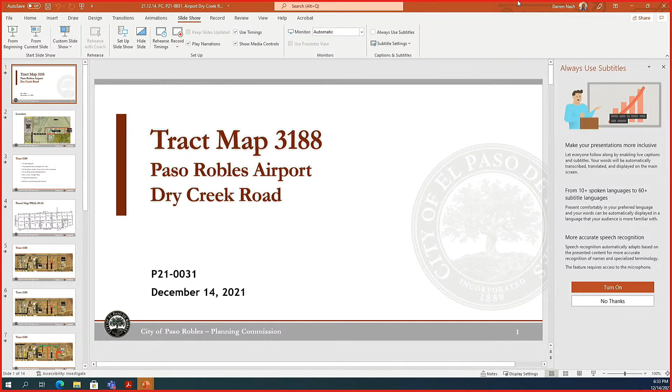So as you stated, this is for tentative tract map 3188, which will be out at the airport. Here's a general location map. You can see Airport Road running north-south off to the left of the screen, and then you've got Dry Creek Road running to the south of tract 3188, shown in the red box. You can see the Estrella Warbirds Museum is at the eastern extent of the tract map.

So there are 11 existing lots that are going to be impacted by the map before you, and the map does result in a total of 12 proposed lots for a net gain of one lot. The tract map is largely to facilitate airport lease sites and circulation in this neighborhood of the airport.

The tract map does include the abandonment of a road known as Cirrus Way. This is an unconstructed road, but it does exist as a legal right-of-way. To replace Cirrus Way, there is a new road proposed, to be named Wright Way, which would be a cul-de-sac ending road. There are also a series of easements both proposed and abandoned as part of this tract map. The tract map does need to be approved by the City Council, so the Planning Commission will be making a recommendation to the City Council this evening.

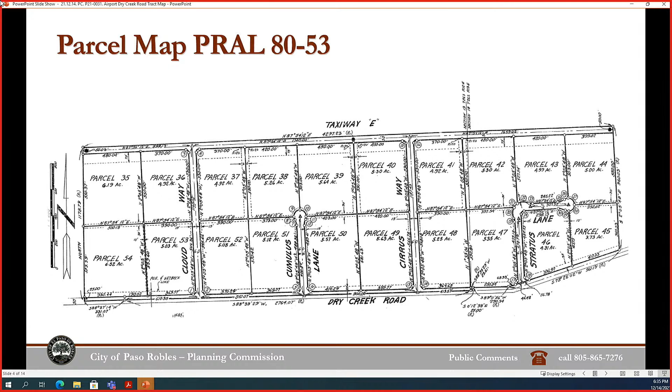So here is parcel map PRAL 80-53. This is a lot line adjustment that was recorded back in 1980, and it established the general circulation and lot pattern along Dry Creek Road. There have been a number of amendments, lot line adjustments, and lot mergers over the years. They are enumerated in the staff report, but I'm not going to go into all that detail, although we certainly can if needed.

But essentially it does result in this general situation - out on the ground it looks like this today. You can see the lots that have numbers on them; they range between 39 and 54. They're not entirely numerical, but these are the lots involved this evening. In addition, there is a remainder lot that some of the airport runways are on, and some of that will be consumed into parcel 45 at the eastern extent of the tract map.

You can see that there are currently Cloud Way, Second Wind Way, and Cirrus Way going into the site, and Cirrus Way is the road that will be abandoned. So here you can see that Cirrus Way is going to be abandoned, and then Wright Way will be established between lots 48 and 47.

As mentioned, the Estrella Warbirds lot, which is lot 45, will be extended out to the east. This isn't exact, but it gives a representation of land that will be added to that lot. That gets taken from the lot that holds all of the airport runways, and then it gets put in for the use of the Estrella Warbirds Museum.

Now we're moving from right to left on the screen. So like I said, lot 45 gets changed. In addition, lots 42 and 47 will be split from each other, and you'll end up with two 5-acre lots there, 42 and 47. Further west, the lot line between lot 53 and 54 will be moved, now in blue, so that the northwest running property line will be made straight all the way up to airport taxiway F. So these are the lots that are changed, by roads being abandoned, lots moved, and then the couple of lot splits and lot line adjustments there.

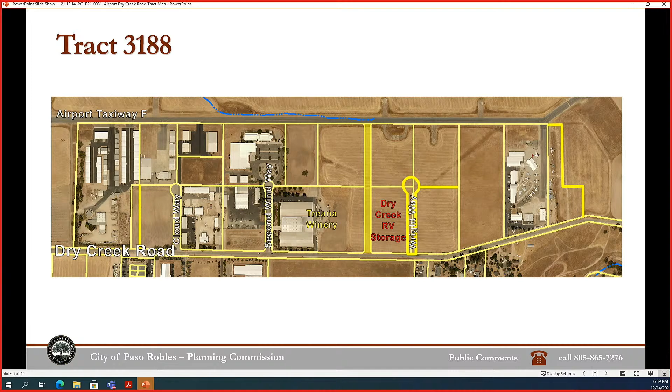In addition, the next item on the agenda is an RV storage facility that Mr. Joe Gowan has proposed, just to give some context for the rest of the evening. This is the site where it says the Dry Creek RV storage—that's where the RV storage was previously approved. This evening, you'll be looking at an amendment that would move the Dry Creek RV storage to the east, to the other side of Wright Way. That is to eventually facilitate Treana using more of the land for an enlarged lease site for their facility.

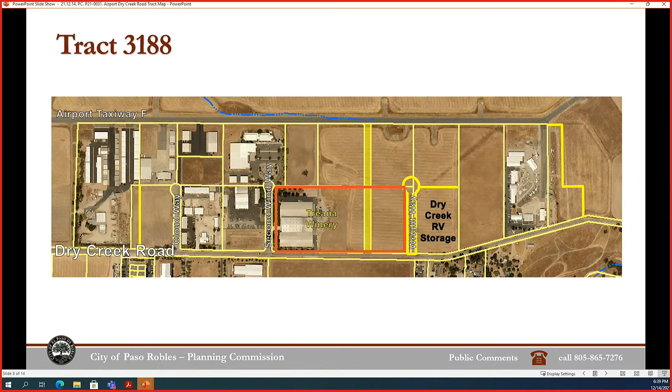So here's a look at the first page of the tract map. You can see kind of the summary that we've already gone over, and then we've got the additional two pages. Happy to zoom into anything that anyone has questions about when I've completed my report here.

So the recommendation is that the Planning Commission will be making a recommendation to the City Council. There are some findings that must be made, ultimately by the City Council, but you would be recommending findings that the project is consistent with the general plan, with the zoning ordinance, and with the airport master plan—that the site is physically suitable for the type of development proposed, that it's not likely to cause any substantial environmental damage, no serious public health problems, and it won't conflict with any easements.

In addition, the resolution includes a statement that the project is consistent with previous environmental review, that this subdivision is consistent with the impacts that were anticipated by the mitigated negative declaration prepared for the 2004 update of the airport master plan. This project is largely a lot line adjustment and really just facilitates the leases that the southern portion of the airport is intended for.

So as always, the Planning Commission does have options. The first would be to adopt the resolution as it's proposed. Second, you could recommend approval with modifications. You could refer the project back to staff if you need more information, or you could deny the project by adopting finding of denial. Staff does recommend option one, which would adopt the resolution and recommend the project to the City Council for their approval. And that is the conclusion of staff's report.

Katie, just for information, could you clarify lot 45? Is that an expansion, or just a lot line adjustment? I think it's where the museum, the Warbirds Museum, is. It's mostly as explanation—just a lot line adjustment. It would expand the size of lot 45 and reduce the size of the remainder parcel where the actual runways are located. If you look at the aerial, you can see the museum is already using some of that land for storage, so this would formalize that. We do also have the airport manager in the room if you have any questions for him. No, I just needed a quick explanation. No further questions.

Thank you. Commissioner Neal, any questions? No questions. I have no questions either.

Commissioner Gibson, any questions for staff? I have basically just one. I also want to commend you, Katie—your illustrations took away pretty much all my questions except for one. I do have one question: it would seem that the Airport Advisory Committee would have weighed in on this, since the impetus seems to be the city, and the applicant is the city. Has the Airport Advisory Committee reviewed this and are they in favor?

Mr. Oxborough is in the room, and he is shaking his head yes, that it was reviewed by that committee. If you want details, we would have to ask Roger to come to the microphone. No, I'm satisfied—if Roger is shaking his head yes, then I'm good. That's all my questions, thank you.

Thank you, Commissioner Gibson. Commissioner Covarrubias, any questions for staff? No, sir, no questions. Okay, thank you.

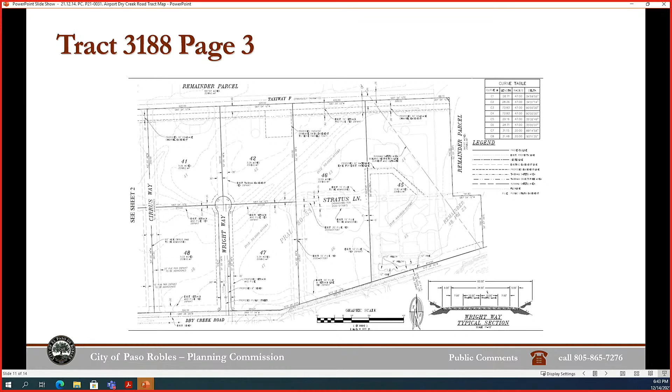Discussion by the Planning Commission, again in the room first, same sequence. Commissioner Jorgensen? No points. Commissioner Davis? Nothing. Commissioner Neal? I have nothing either. Commissioner Gibson, any further discussion? No, sir, I do not. Commissioner Covarrubias? No, sir, I'm good.

Chairperson Kogler, I'd like to make a motion. Yes, please do. Recommend City Council approve tentative tract map 3188 by adopting the draft resolution. I'll second that—motion by Commissioner Neal, seconded by Commissioner Davis. Is there any further discussion on this item? Hearing none, I would ask staff to please call the roll.

Chairperson Neal, aye. Chairperson Davis, aye. Chairperson Covarrubias, aye. Chairperson Gibson, aye. Chairperson Jorgensen, aye. Chairperson Kogler, aye. Motion passes, motion passes 6-0.

Very good, thank you. Move on to our next item, item number 2 under G of public hearings. This is a public hearing for the Gowan RV Storage Facility Development Plan 21-08 and Conditional Use Permit 21-24, P21-0087. The applicant is Mr. Joe Gowan, 4050 Dry Creek Road. That property is parcel 025-0471-035. Could we have a staff report, please?

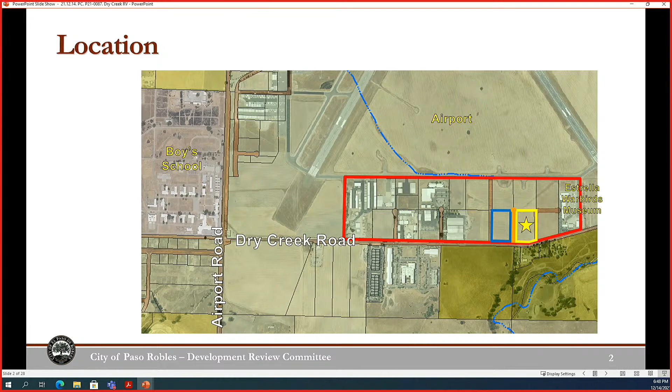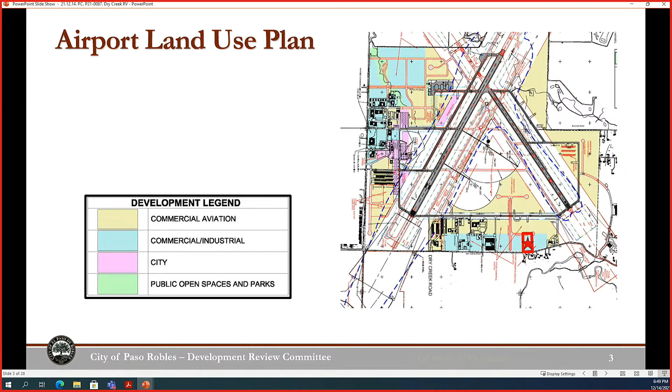So this is to the east of Wright Way. The airport land use plan does envision commercial and industrial lease sites along Dry Creek Road, and in the red star, I think there's a box there, that's the general location. So you can see this is within the commercial industrial development area, showing the consistency of the project with the airport land use plan.

So this is an RV storage facility that's going to be located in the airport zoning district with the PD overlay. The site overall is about 5.3 acres. About 4.7 acres of the site are usable due to access easements, or excuse me, utilities easements that ring the property. The site is east of Wright Way.

The project does include not quite 103,000 square feet of carport covers that would store about 195 RVs. This is very similar to the previously approved project that had a little bit more carport space, 108,000 square feet, but was only for 193 RVs—very, very similar. And again, a 680 square foot office. The development plan and the conditional use permit can be approved by the Planning Commission this evening. This does not need action by the City Council.

Looking at the site plan on the left side, the slightly smaller site plan is the previously approved site plan that Planning Commission approved last year. As you can see on the right, this is just a mirror image of what was proposed previously. The site has a slightly different size because Dry Creek Road does curve up to the north, so you end up with a little bit of a different size. There is also a public utilities easement along the east side that is dissimilar to the previously approved site. Now the site will be entered from the west side, and there is a little office here, and then of course you've got all the RV storage buildings, and as I already mentioned, there's a public utilities easement on the east side.

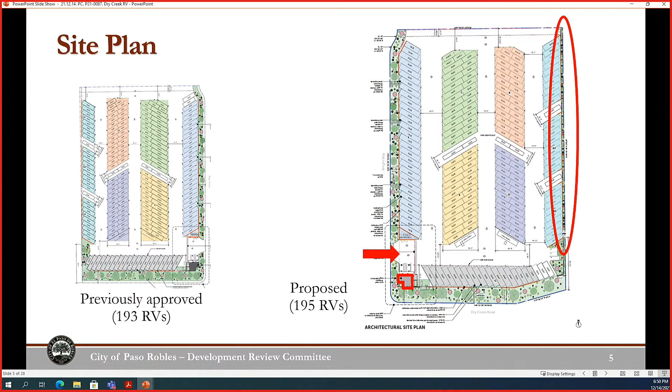In the previously approved project, there were 3 parking spaces proposed, and the Planning Commission did add a condition of approval that required at least 3 more parking spaces to be added. You can see here, this is very similar—the 3 parking spaces as were originally approved—and the applicant has included 3 additional spaces towards the east side of the screen. So there are a total of 6 parking spaces now proposed. This is a reduction from the number of parking spaces that would typically be required for a storage yard. However, the conditions of approval require the applicant to allow folks to park in their parking stall.

Their normal car can park where their RV would normally be parked when they take the RV out for use, so there's essentially more parking available on site.

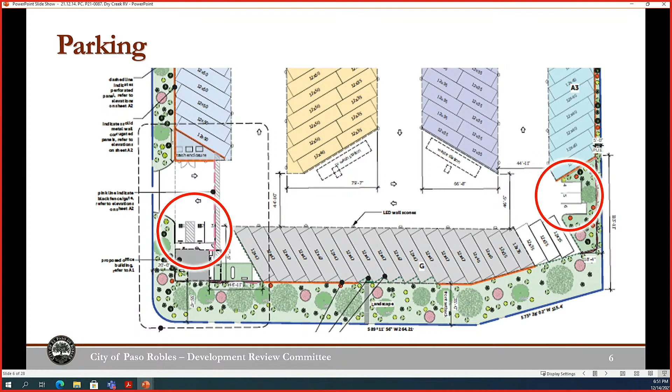Looking at the landscape plan, the new plan does include stormwater basins that run along the perimeter of the site. You can see them in the top right-hand corner. That's the civil plan, the stormwater plan. I've highlighted the green area, that's where there's some landscape stormwater basins.

The landscaping is in the same general area, but you should be aware that there is going to be a basin in that area, so that will impact how the landscape will appear.

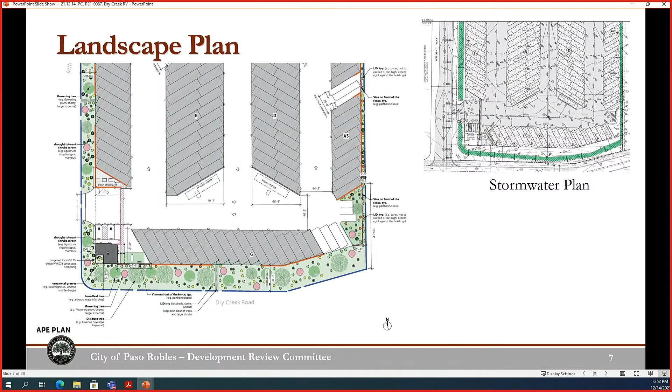There was some discussion at the Development Review Committee. The project does include some operable panels. The fire department needed access, these buildings are very long, and the fire department needed access at more points. So the architect has included some doors within some screening panels. You can see here in green that there's some doors.

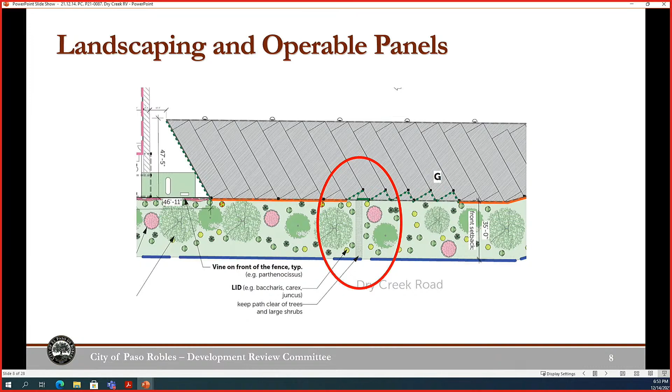The applicant is demonstrating here that they will leave a path to those doors open without landscaping so that the fire department does have access. I was previously under a misapprehension that the entire panels moved, and so thought more of the landscaping needed to be reoriented, but it's really just a man door here where the firefighters are going to need some access. There are some paths shown here that will not include landscaping.

This kind of moves to the rear of the site. The LID, low impact development basins do continue along the rear and side property lines. There's no landscaping proposed along the rear property line, but there is a condition of approval included in the document handed to you this evening that would require the applicant to put some vining plants on the fence along the rear property line that would screen the RVs from the north.

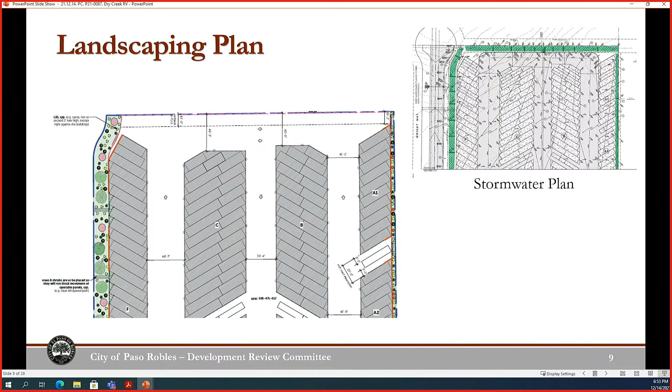Here's a look at the landscaping materials. Another condition of approval included this evening, and I think is something we might want to discuss, is condition B, which would limit the shrubs in the front and street side setback to no more than 3 feet in height except for vining plants. The intent here was that in the municipal code, there is a requirement that shrubs not be more than 3 feet in height, similar to a fence, in the front and side setbacks. So the idea here would be that low shrubs would be allowed, but not really tall plants.

There are some plant varieties included in the plant palette that would be too tall for these areas. The idea is to try to balance screening with not making the development look like a fortress. I think we certainly don't want to see all of the screening, but we want there to be tasteful landscaping. So this is a condition that's been added and maybe needs some further refinement or discussion.

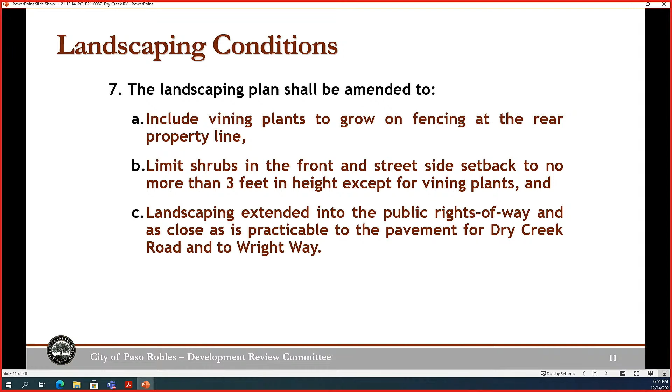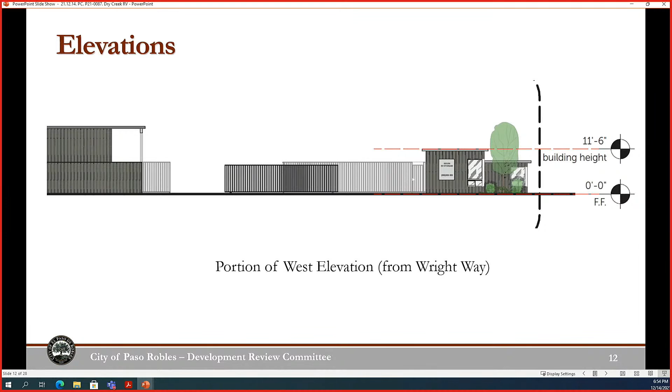Let's see what we have here. Now moving into the elevations, the buildings are really long, and as you've noted in the staff report, they're hard to parse. Here's a zoom in on what the west elevation would look like from Wright Way. You can see the office building and then some fencing, and then the tall building starts off to the left and does continue to the north.

Similarly, on Dry Creek Road, you've got the office there on the left, and then you can see the buildings as they'll look zoomed in, and then that building does continue off to the east, which would be the right of the screen.

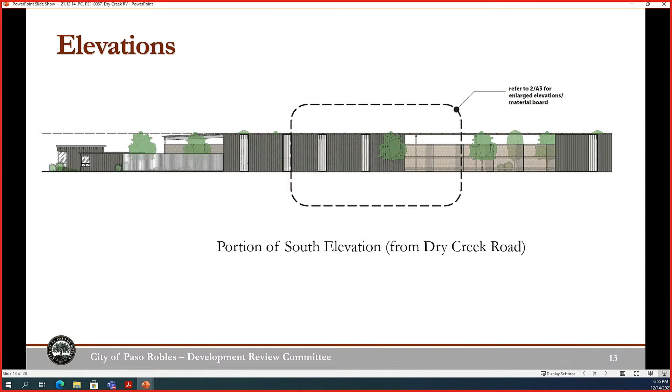So here are the storage building proposed materials. It is a mix of dark gray standing seam wall panels interspersed with light gray corrugated metal roof panels. In addition, there are some areas that have this bronze colored perforated metal panel. These will screen, but not completely, it'll make the building feel less like a fortress is the idea.

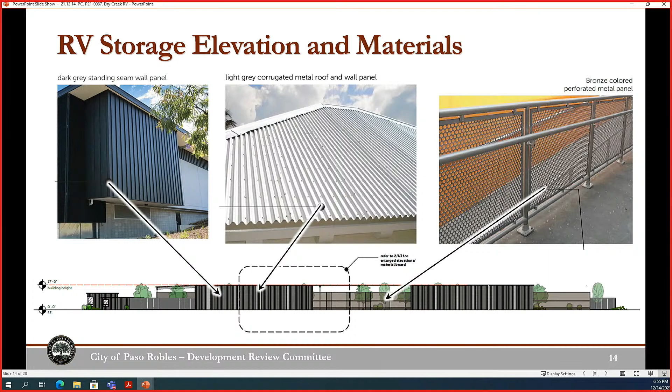So you've got this mixture of materials on these low, long buildings. And then you can see these again, a little bit closer in on that elevation. The office is made up of very similar building materials, dark gray standing seam metal wall panels, and then you've got that black fencing.

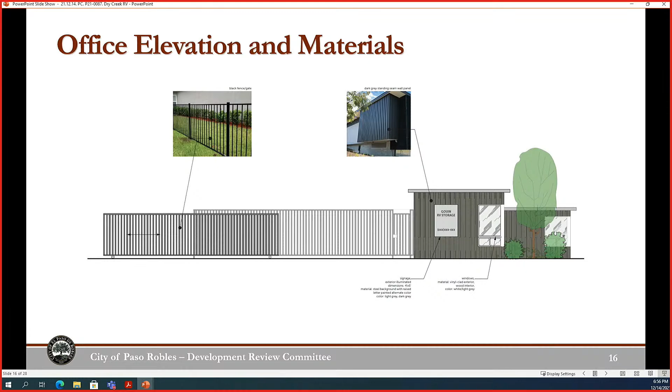I do want to point out that fencing is proposed at an 8-foot height, and so that is also something the Planning Commission is approving this evening. Typically, we don't allow fences taller than 6 feet unless the Planning Commission or the DRC approves a taller fence.

There are a series of conditions of approval that address the operation of the project, which is both a conditional use permit and a development plan. There's a condition, also in the previous approval, that doesn't allow renters to work on their boats or RVs stored on the site—they need to do that elsewhere. Number 10 addresses parking and allows renters to park within the stalls.

Number 11 would not allow additional outdoor storage not designated in the RV storage spaces on the site plan. Storage would be limited just to RVs, boats, and other vehicle storage. Any fabric or tarp style vehicle covers would need to be securely fastened so we don't have things blowing in the wind and looking unsightly. The fence and landscape screening needs to be maintained over time.

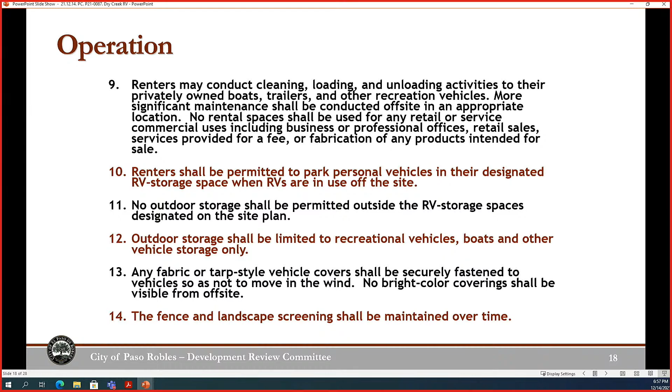There are some additional conditions of approval that haven't been mentioned before, and I'm going through these carefully because they were not included in the staff report. Number 6 would require that Tract 3188 be recorded before we issue a building permit for Mr. Gouin's project. Right now his project would be within some access easements and would not have access via right of way, so that tract map needs to be recorded for him to get building permits issued.

There are also some engineering and airport-related conditions of approval that would not allow reflective construction materials, and would not allow the creation of electromagnetic emissions that would disrupt the navigation equipment on board an aircraft. The project would not create obstacles or anything over 150 feet above the published airport elevation.

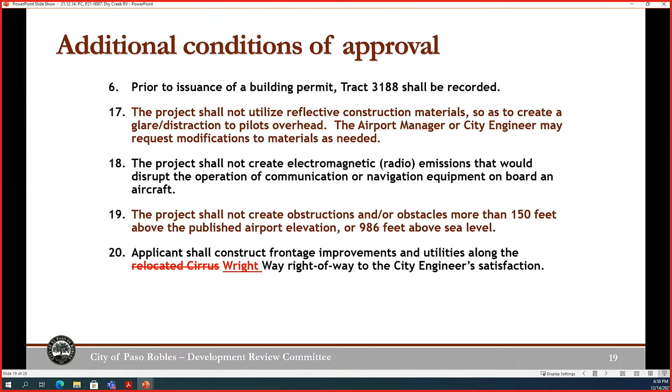There's also a condition that talks about constructing frontage improvements. Mr. Athey had referred to it as relocated Cirrus Way. It is proposed to be Wright Way, so we might perhaps want to change that condition of approval. I believe the applicant would like to discuss this and may have some questions about it when they have an opportunity to speak.

So there are a series of findings the Planning Commission must make. Some relate to the development plan: that the project is consistent with the general plan, the zoning ordinance, and the airport master plan; that it has high aesthetic quality; that it's compatible with neighboring development; and that it doesn't generate too much traffic.

The conditional use permit also has findings that need to be made—that the establishment and operation of the land use won't be detrimental to the public health, safety, and morals of the community, that the project won't be injurious or detrimental to the general welfare of the city, and that it won't be detrimental to the city's efforts to revitalize the downtown.

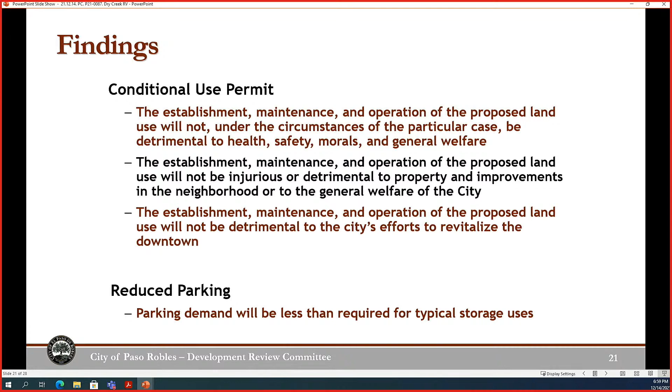I think it's important to remember, it's not everyone's favorite project to see storage, but having a storage facility like this gives folks a place to store their RVs so they don't end up in neighborhoods where they really crowd up and cause clutter. The Planning Commission is asked to reduce the parking requirement this evening, so there's a finding that parking demand will be less than required for typical storage uses, included in your resolution as well.

The environmental determination recommended for the Planning Commission this evening is a Class 32 exemption. Class 32 exemptions are appropriate for projects consistent with the general plan and all other applicable plans and policies, which this project is. The site needs to be within city limits and on a site of no more than 5 acres. This site's usable area is under 5 acres, just about 4 3/4 acres, so it's pushing that size limit but is under the threshold.

The site does not have any value as habitat for endangered, rare, or threatened species. The airport did have some biological surveys done on the site related to a different project within the last 5 years, and did not find any of the habitat we've found in other places on the airport. The project would not result in any significant effect to traffic, noise, air quality, or water quality, and there are adequate utilities to serve the project.

Options before the Planning Commission would be to adopt the draft resolution to approve the development plan and the conditional use permit.

You could amend and adopt the draft resolution. You could refer the project back to staff, or you could deny the draft resolution and the project based on a determination that it doesn't meet one or more of the required findings.

Staff is recommending option 2, that you approve the draft resolution, but add the site-specific conditions of approval that were inadvertently omitted. I've got them all listed here. I'm not going to go through them since we've all got them in front of us, unless Mr. Gibson, you need to see them. We can go through them slowly, but they're here. And I believe that is the end of staff's report.

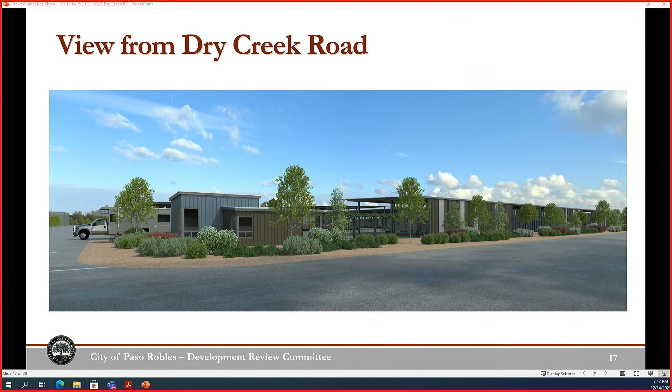I will make the motion with the adjustments: adopt draft resolution A, attachment 4, approving Plan Development 21-08 and Conditional Use Permit 21-24 based on findings and subject to site-specific conditions of approval, editing site-specific condition of approval 7B to say front landscaping shall be varied in height, not to exceed 6 feet, with a limit of 3 feet at the entry to the project off Dry Creek.

Here we have a motion. Is there a second? I'll second, from Commissioner Jorgensen. Is there any further discussion by commission here in chambers or Mr. Gibson? Hearing and seeing none, I'll ask staff to please call the question.

Commissioner Neal, aye. Commissioner Jorgensen, aye. Commissioner Davis, aye. Commissioner Gibson, aye. Chairperson Kogler, aye. Item passes 5-0. Very good. Thank you. Commissioner Covarrubias will rejoin the meeting now.

As we move into public hearing number 3 for this evening, it's the Beechwood Specific Plan Phase 1A, Vesting Tentative Tract Map 3166, and Master Plan PD 21-11, P21-0102. The applicant is Herod Paso LP. The project is located at the southeast corner of Beechwood Drive and Meadowlark Road, Beechwood Specific Plan Phase 1A, APNs 009-863-003, 04, 08, 10, 11, and 12. There was an addendum to this agenda item.

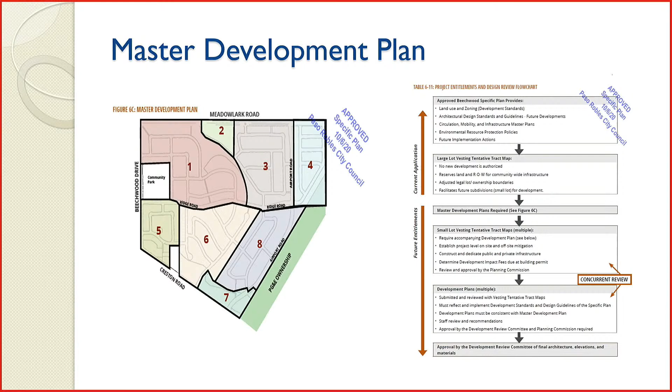A little bit long-winded, but that's kind of how this flow chart goes through. This gets more into the last half, the future entitlements, or what we're doing tonight. The master development plan basically is saying we need to do the tentative map and the development plan—those two together are the master development plan. The DRC is then another step that happens to get some of the final details.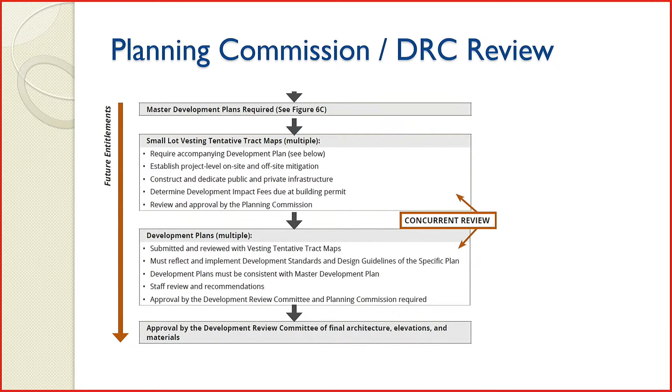So with that, I'm going to have Jeremy Friend from Rick Engineering go through his presentation. However, Mr. Chairman, if we have any questions prior to the start, I'd be happy to try to answer those before Jeremy's presentation. Do any commissioners have initial questions for Mr. Nash? Hearing none, we'll proceed. Jeremy, go ahead.

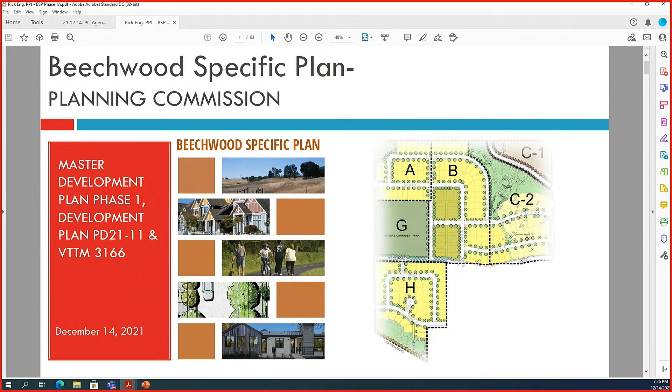First couple of slides we're going to go through rather quickly because Darren hit on quite a few of them already. The specific plan was approved with an area of 234 acres, including 23.8 acres of an existing PG&E power easement. We're focusing on this upper quadrant. The BSP was approved back in October 2020 with a total of 911 units, a combination of single family and multifamily, and approximately 47,000 square feet of commercial.

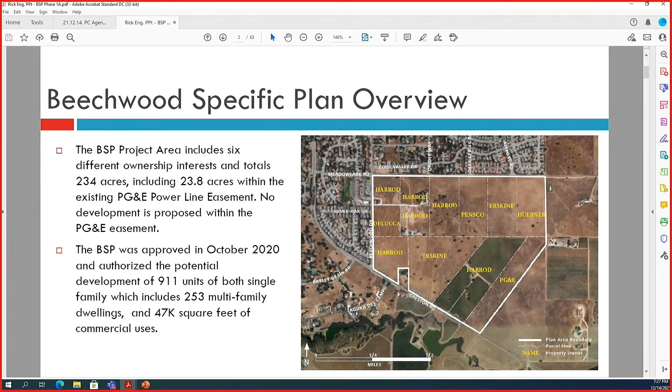As Darren mentioned, for the flow chart, where we are at and where it's already been going through phase one, the specific plan was approved back in October, and the final large lot tract map was approved and recorded in November of 2021. We are focusing on what's called Phase 1A Master Development Plan, Vesting Tentative Tract Map 3166. That is our focus for tonight. Just to emphasize where we're at and what the Master Development area covers, it is Area 2, Area 1, and Area 5, as well as the community park. That's all part of Phase 1A.

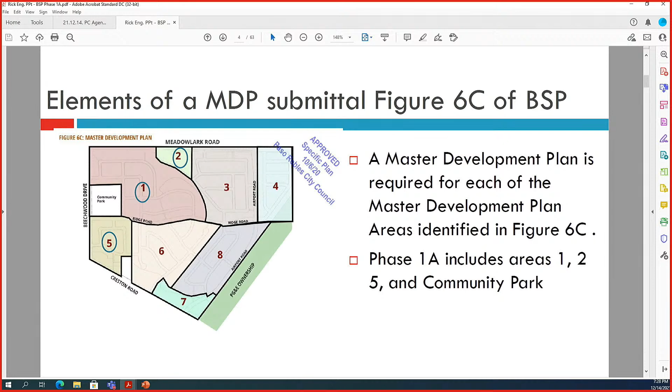Before you is the Phase 1A sub-areas: A, B, C1, C2, G, and H. G is the park site, so that is truly just an allocation of the future park. I'll go further into what that means in the process of designing the park and when the park would be built out.

Phase 1A sub-areas total 205 residential lots and 30 non-residential lots. The non-residential lots are a combination of tract amenities, whether it's the park site, private streets, water quality basins, and also open space lots. The individual sub-areas A, B, C2, and H are where the residential development is occurring.

This plan is proposing different use types in those individual sub-areas. C1, which is the future multifamily site, we've allocated — that's going to be a whole separate development plan process. We're just allocating the lotting, allowing the lot to be developed for future development. For the design of the whole tract, we identified a future water quality basin, as well as the private street, our Oriole Way, going through there.

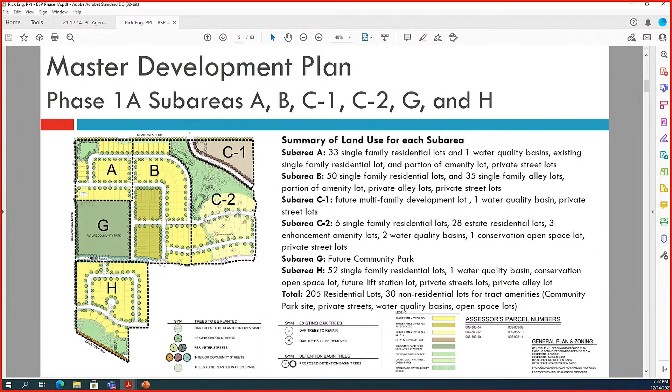With this master plan development, we are looking at consistency with the overall Beechwood specific plan. What you see here is, and I'll go through all these criteria, that we are in compliance with the BSP, the VTM, as well as the Master Development Plan, and consistent with the BSP. This list is actually the same criteria that needs to be submitted for a Master Plan application.

So again, there's an additional level of consistency - these are the items that need to be identified and addressed to qualify for a Master Development Plan. Therefore, we are consistent with the BSP.

What you see here is a consistency between the original illustrative plan and the proposed Master Development Plan. The similarities are based on the same densities in the sub-areas, the same similar dwelling units within the sub-areas, as well as road alignments, road improvements, the future park site, and identification of all the water quality basins. So the consistency within the two plans is identical to what you see before you.

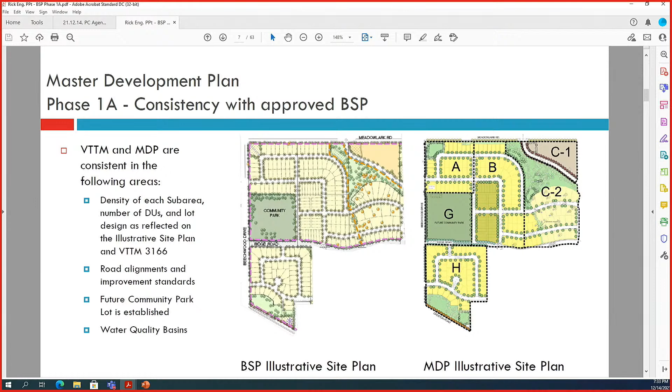What this represents is the BSP illustrative site plan on the right, and actually the vesting map. We've highlighted, because we're focused on A, B, C2, C1, and H, the same areas with the same road configuration and same lotting pattern. So the vesting map is consistent with the actual illustrative and lotting pattern, master lotting plan that was designed to create the site plan through the BSP process.

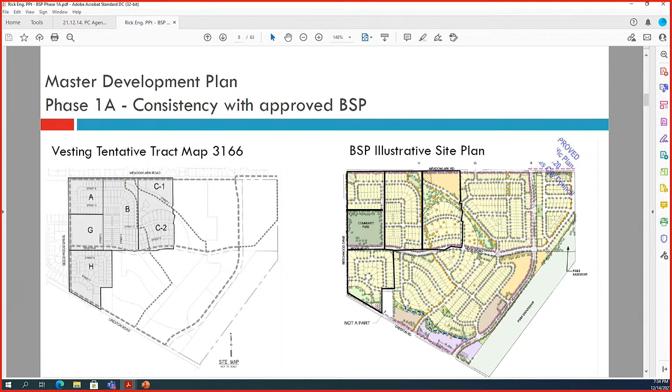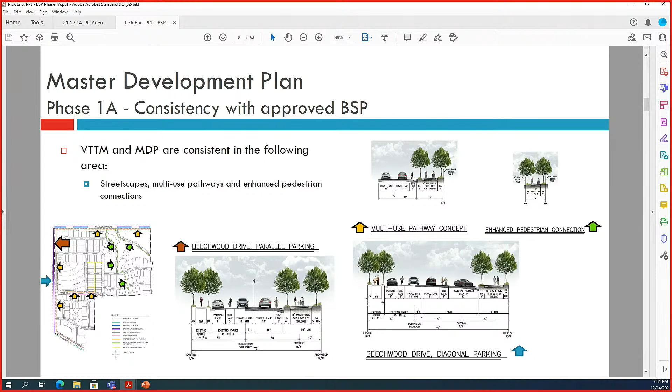Through this process, street design was necessary, and the circulation pattern was important. We identified where we're consistent, identical to the specific plan - our road configurations, as well as the streetscapes, the multi-use pathways, and enhanced pedestrian connections. They all were in the exact same locations, exact same pattern that was in the specific plan.

The preservation of oak trees was a key item in the design of phase 1A, in particular area C2. There is already an approved oak tree removal permit, and we are in compliance with that. We've designed around and complied with the Mitigation Monitoring Reporting Program Bio 5, which outlines certain design criteria to protect the oak trees and preserve them.

We identify in our plans that all construction notes will comply with the MMRP Bio 5 criteria for grading and construction plans. We must identify all critical root zones in the tree areas. When you submit those grading plans, they need to be reviewed and approved by an arborist or a qualified biologist. On top of that, on your grading plans you would also identify where you're going to protect around the trees. This was a critical component in the design of area C2.

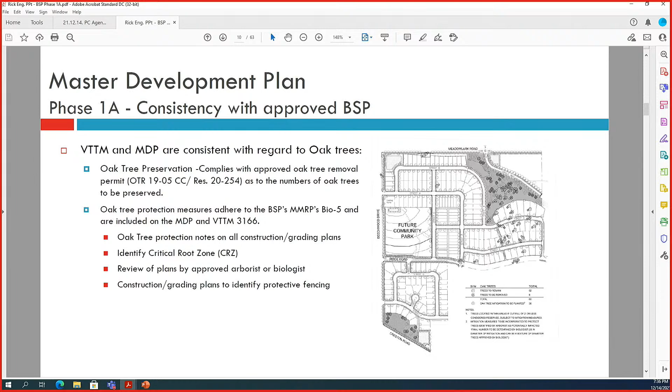Going a little bit further when we're actually lotting out and designing the lot - this is a typical lot designed to protect an existing oak tree, where we put the fencing, keeping a separation with the square footage of the house, floor plan away from the tree, and designing around it.

There was also a component we are proposing about long-term maintenance, because we want to protect the trees - who is responsible for that. The HOA will be responsible to monitor the existing oak trees in public spaces. The CC&Rs will then, for 5 years, make sure there's no impacts to those trees, and then come up with suggestions if there happen to be impacts, to the landowner of how to rectify any potential problems, with submittal and review by the Director of Community Development.

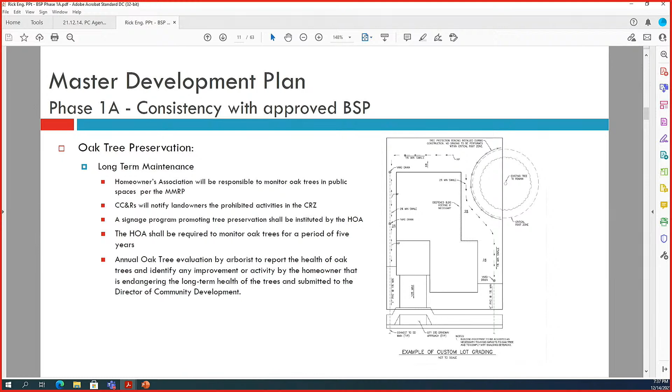Front yard landscaping - we have different components of landscaping in the front yard, but we did adhere to the BSP of having water efficient landscaping, prohibiting turf in parkways, and limiting the amount of turf in the front yard. If front yards would like turf, they would comply with the city's zoning ordinance about turf maintenance and turf installation in front yards.

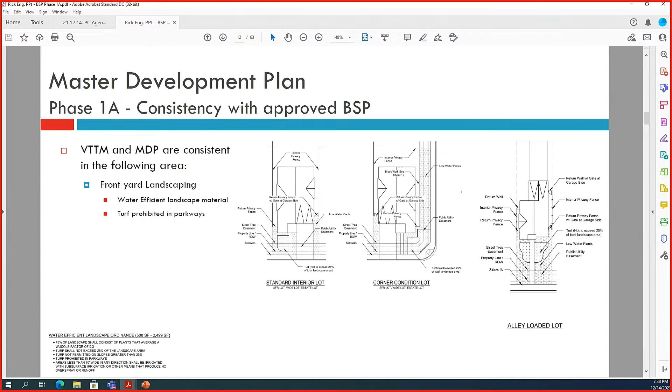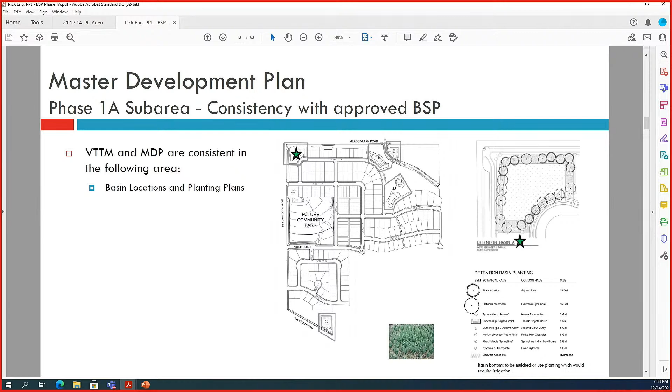Water quality basins are in the same location as proposed, as well as the planting of them. We did identify that the basin bottoms could be mulched or planted and irrigated. For example, there is this Juncus plant style that can survive quite a bit, but they would require irrigation, and that was something we would have to irrigate if we put that plant material at the basin bottoms.

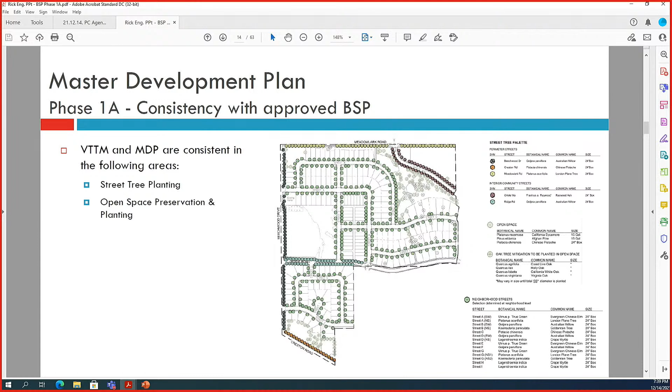Street tree planting was done in the design, taking into consideration the street trees. All the trees identified in the master development plan are taken directly out of the BSP. There's a variety of different street trees, based on themes throughout the development, and we adhere to that, as well as the identity of the oak tree planting areas within the open space pockets. We identify what type of oak trees could be put there, and utilize those areas as mitigation sites.

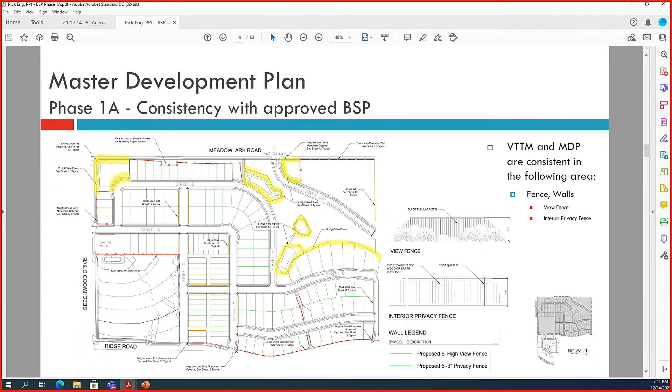There's additional fence wall, which we call the view fencing material, which is a tubular steel fence, black. That's identified around all the basins. And then we have all the interior fencing, shown in green - if I highlighted all that, you wouldn't be able to see it as well. So it's all the interior fence lines. It would be a fence material, whether wood or vinyl, in earth tone colors, muted earth tone colors. And these are the view fencings as well as the privacy fencings.

Included in the wall is the monumentation locations. We've got what's called the entry monuments and the freestanding monuments. The major entry monuments are at this corner of this area. Those monuments are going to be stucco, earth tone, muted earth tone, stucco walls.

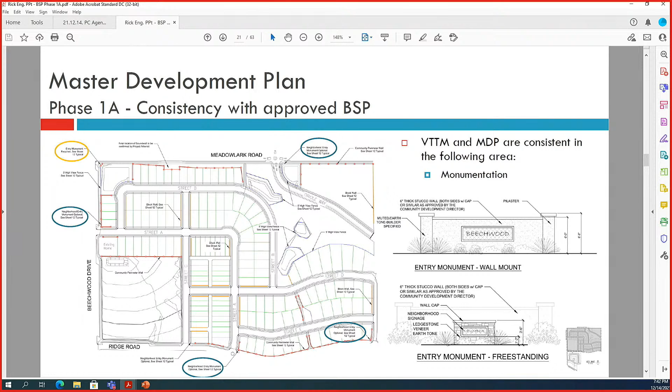All of the other component entries - there, here, here, and down here on this northern half - we call the entry monuments. They can be freestanding; there's enough area to actually put a freestanding sign, or if there's a choice, they could put in a diagonal attached entry monument sign, wall mounted. There is enough room and space, and we designed the walls so they can be designed that way in those locations as well.

Southern half, again, we have a major entry point identified in the specific plan in the same location, and the secondary monument locations.

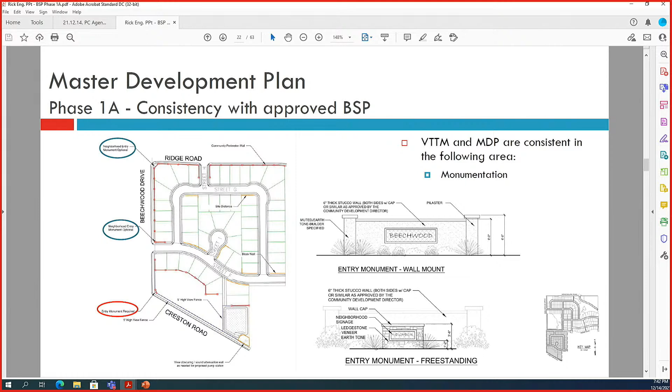The plan that we submitted did include 3 architectural styles. One example here is the modern farmhouse. There was also the modern California contemporary and the Mediterranean. And there was a 4th one, which is the prairie. I'll explain further in my presentation about that, because that is a new style that was presented. But these 3 styles are similar to what was in the specific plan.

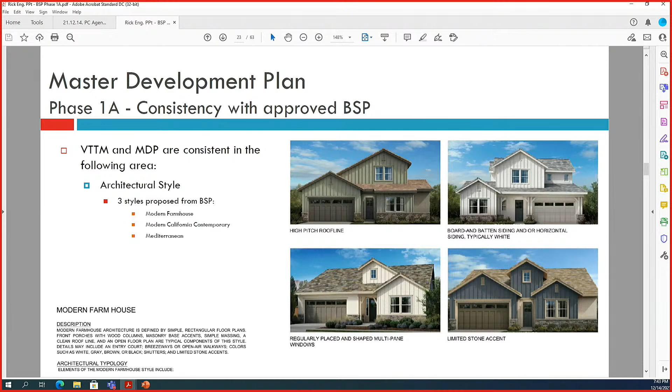Development of the individual lots took into consideration the design standards. So for development standards, we are in compliance with the front yard, rear, and side setbacks. There was also other lot development criteria that we looked at for ADUs, as well as parking and open space. All those standards we identify here are the same standards that were proposed in the specific plan. Those are where we have been consistent with the specific plan.

This is a summary of the minor changes we are proposing to the specific plan, which includes road alignment changes, to preserve oak trees, water quality basin designs. We are proposing 3-to-1 slopes, as well as putting a perimeter tubular fence wall, and design development standards regarding setbacks for ADUs and alley loaded lots, and finally the additional architectural style, which is the new one we're proposing, prairie. The minor road alignment was this bulb out.

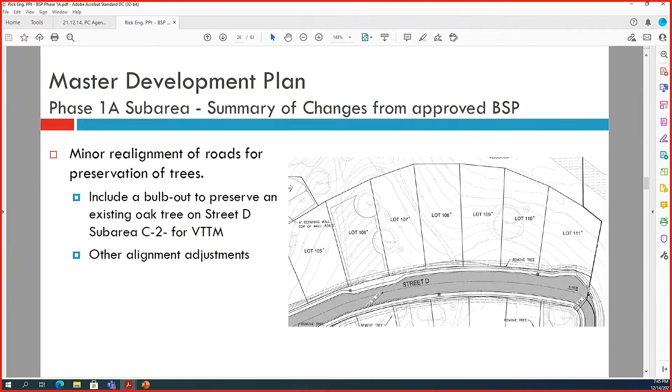In order to protect this oak tree, we actually designed a bulb-out around to protect that tree within area C2. There were some other really minor adjustments having to do with configuration around the basins and around the development, but graphically it's so minor it would not be visible. For water quality basins, we were proposing 3-to-1 side slopes, perimeter tubing around basins, as well as showing the potential planting and irrigation of the basin bottoms.

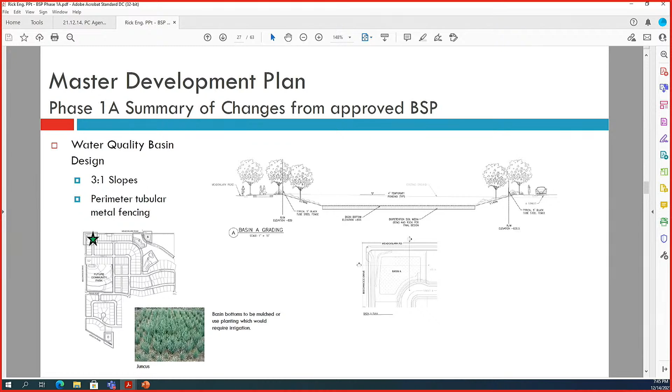For development standards, because the specific plan did identify ADUs, we took into design consideration how to design an ADU on the plan and refined it to better fit ADUs on a site. We identified that ADUs would be allowed a 10-foot front yard setback if they're detached ADUs.

We also defined the difference between an accessory building and an accessory dwelling unit in our master development plan, because we wanted to clearly identify where we would like to see an ADU located. This provided a clear understanding in the table of where an ADU could actually be located versus just an accessory building.

We want a clear definition, so there wasn't any misunderstanding. For alley loaded lots, we did allow 3-foot side yards, and garages to be 3 to 5 feet setback from the alleyways. That allows us to put in a landscape strip in that area, and gives a little more variety for those garages, so they're not just sticking right on the front of the alley.

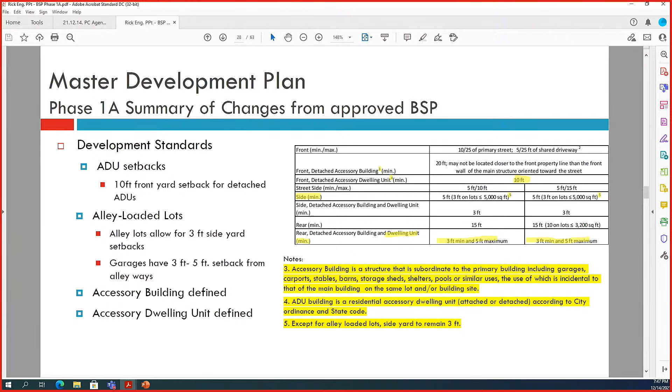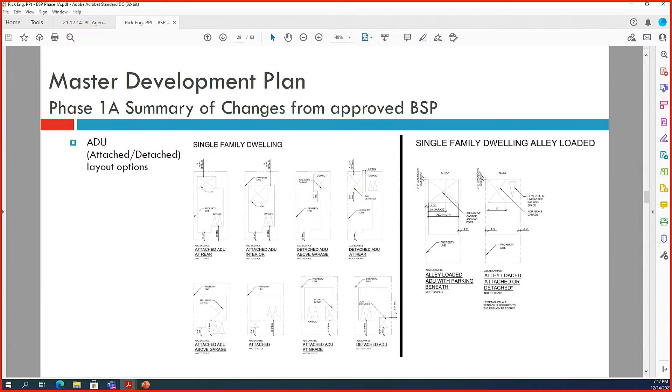Finally, the summary of proposed changes includes this additional architectural style. The style guide in the specific plan identified three styles, and it's a guide. Talking with the city and with the developers, we looked at an additional prairie style, and considered what was conducive to the area of Paso Robles. We believe this is a style and vernacular that would work within Paso, so we applied and included it as a potential style.

As I mentioned before, Area G is the park site location, and there was a lot of discussion about what's going to happen on the park and when. What you see before you is the vesting tentative map, which actually initiates the community park development because it creates the lot, so we can move along with the process.

From there, we take the preliminary concept plan that was done, which went through the advisory committee and also created the basis of a budget and construction budget for the park. Once the advisory committee approved and reviewed it, the next step, since we're now establishing it as Lot 218, is that by the 150th building permit the park developer will have to meet with the city.

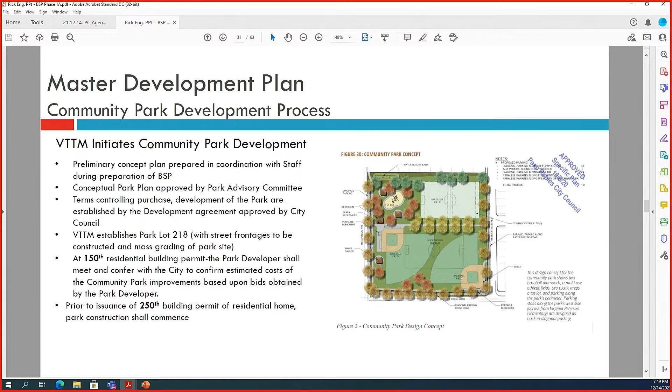What you're seeing here is the next steps for the actual park itself. You're going to go through 50% design, and there will be an open house to review that design. Following any potential comments, we will then go back to the advisory committee and get final approval of the 100% design plans.

And if there are some minor tweaks going through the design plans, we'll still be coordinating with the Parks and Recreation Department to ultimately get the 100% design, and therefore it would then go out to bid and construct.

The understanding is the park site was originally smaller, but during the BSP process, the park site grew. With the understanding that there was density and a number of units identified for Area G, and the original units were looking to be townhome style units, the specific plan authorized the direct transfer of those units, 32 of them, to sub-area I and J, because they are of similar uses, and it's also codified in the development agreement.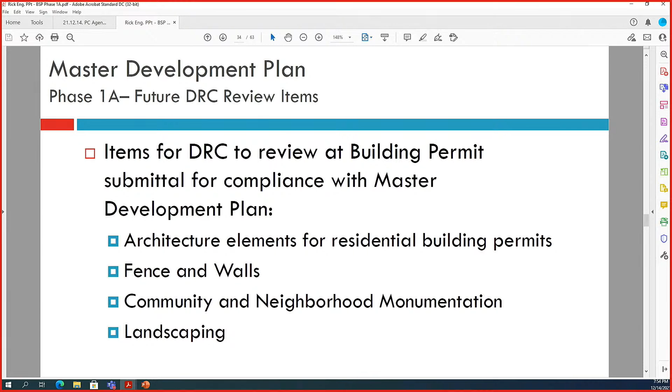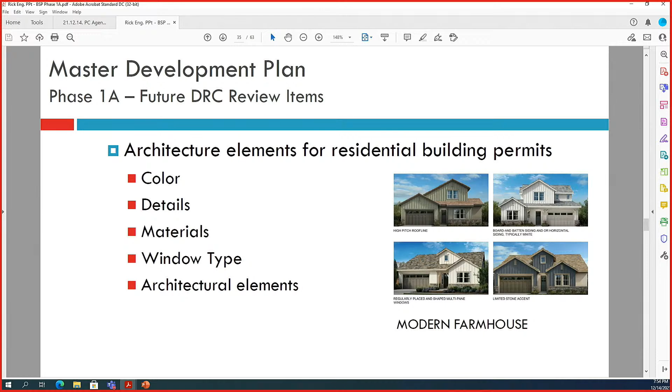They will be reviewing the architectural elements, the fence and walls, community and neighborhood monumentation, and landscaping. When it comes to architectural style, they would be looking at the architectural elements, through the building permit process - the colors, the materials, the window types, and ancillary architectural elements tied to the themes we presented and submitted with our MDP.

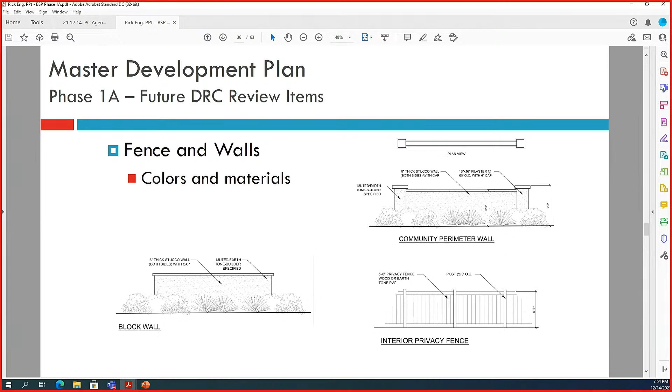When it comes to the walls, we have the community perimeter wall, the interior privacy fence wall, and the block wall, which is also stucco. They will be looking at the colors and materials that will be consistent with the MDP. For community neighborhood monumentation, they'll be looking at colors, materials, lettering size, and styles.

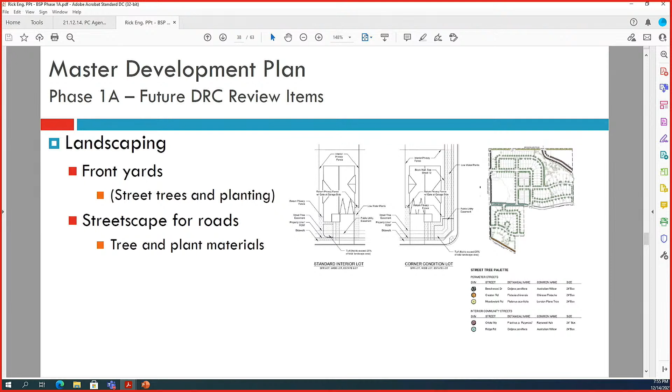Front yard landscaping, they will be looking at a combination of the street trees, because we identified what street trees would be planted, as well as the front yard planting plans that we identified. We have a long list of plants taken directly out of a specific plan. They can choose from those plants and make sure they're in compliance with the configuration.

When we presented at DRC, there were 4 main topics that were brought up: one was the architectural style of the California Contemporary, the park construction timing, the detention landscaping, as well as tract fencing materials.

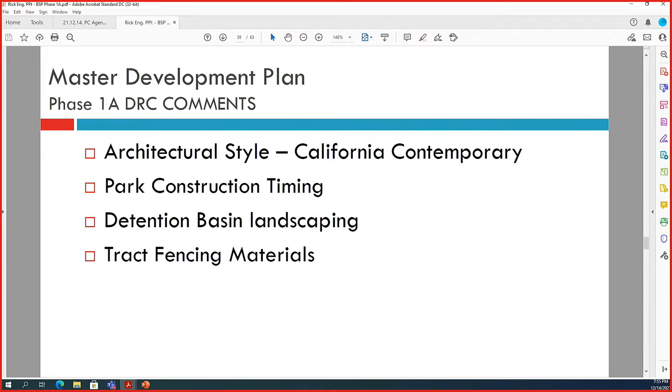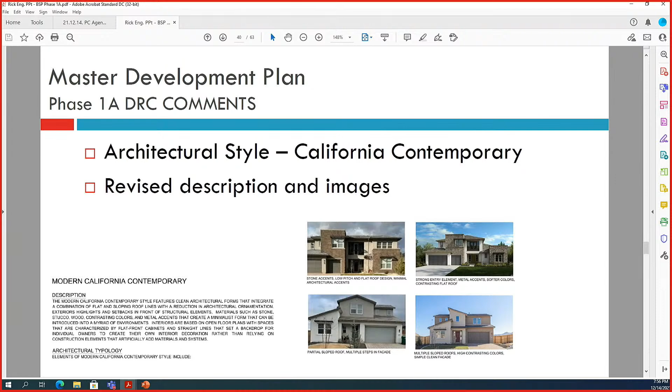For the architectural style, the California Contemporary, we looked at different variations, and with that we did revise the description of California Contemporary to be modern California Contemporary. We have additional new images of different styling of California Contemporary, giving more variety of housing aesthetics and components. We feel that this variety will be more suitable for the Paso Robles area than was originally proposed at DRC.

I did hit on some of the park construction before, but the question came up: when is the park going to happen? Our understanding is that at the 150th building permit, the developer has to come back to the city and confirm the construction estimates and then obtain bids. From there, it is anticipated per the BSP that construction of the park would start in phase 2, with design efforts commencing prior to the 250th building permit.

There's a typo there - once you're under construction of the park, you have to complete it within 12 months. With all that said, the understanding is the actual builders of this area understand the importance of this community park, and have actually put into consideration building that park in phase 1A because they value the importance of that park.

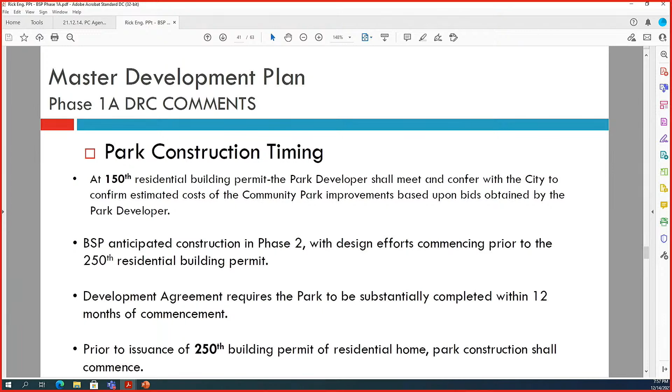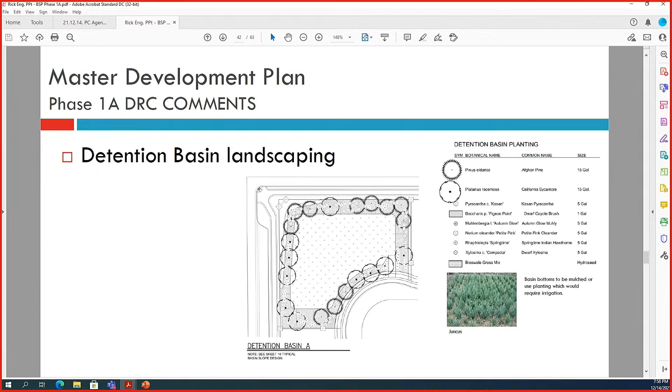Detention landscaping. Originally, we were looking at different landscaping of the detention basins and what the basin bottoms would be like. The surrounding of the basins is heavily vegetated. Because a lot of the basins are entry points to the development, we would be looking at an option of putting in planted and irrigated basin bottoms, and one example of that plant could be the juncus.

Fence materials were brought up. On Ridge Road, there was a question about the block walls and perimeter wall along the road. The reason why, instead of having privacy fencing, wood or vinyl, is that the specific plan addressed this because they want continuity and that area to be permanent. They don't want a property owner coming in and replacing or changing out materials. These block walls are made of stucco, they are visually appealing, and they're not something you'd want torn out constantly. That's one of the reasons why that block wall, perimeter wall, was proposed in that area.

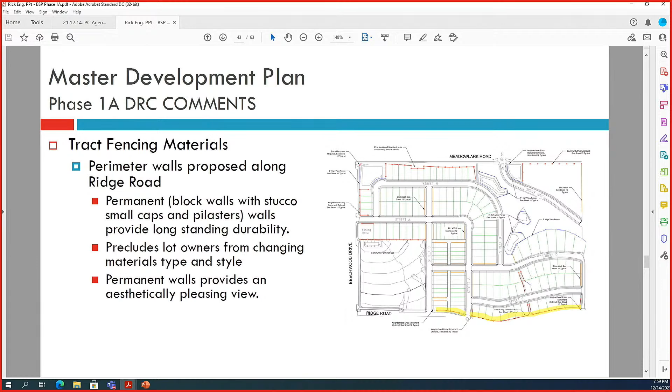So with this, you've gone over the master development plan, the development plan, and the vesting tentative map, lotting configuration. We are consistent with the specific plan. We identified that our total acreages are in compliance, our densities are equivalent, our streetscapes, fence walls, monumentation, preservation of oak trees, street tree plans, front yards, design standards, and architectural styles are all in compliance. We support staff's recommendation for approval of the master development plan and the vesting map, with the corresponding conditions of approval, with one caveat: it states 204 residential units, but it's actually 205 residential lots and 30 non-residential lots.

That sums up my presentation. We do have people in the audience available for questions, and I'm also available for questions.

Thank you. At this point in time, we'll ask the Planning Commission if they have questions of staff and the developer's team. Start with Commissioner Jorgensen. Yes, thank you.

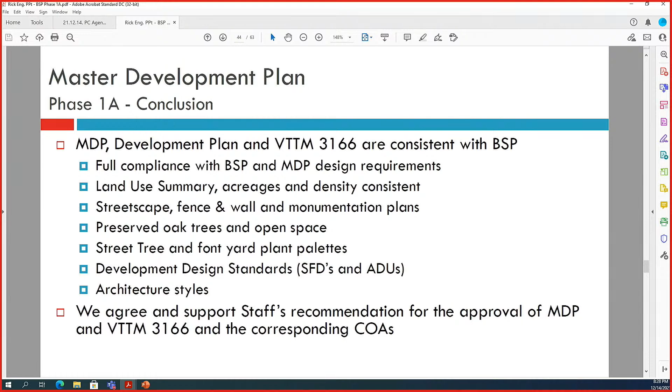So that's the basis of it. Most of the local roads are maintained by the HOA. Some of the street lighting is paid for by the Community Facilities District. City services are paid for by the Community Facilities District. And so there's a couple mechanisms within this development for maintenance, and it's not complicated, but it is laid out in this specific plan fairly clearly.

Okay, David, I appreciate that clarification. Thank you very much. I don't have any other questions at this time. Okay, thank you. Commissioner Gibson, questions?

Yes, thank you. So I apologize, I've heard different versions of this response. I just need to get clarity on this. On page 83, am I now hearing that the words in phase 2 should be stricken?

There's a general affirmation of that, yes. And again, this isn't part of a resolution the way it's on page 83. It was a staff report, so that clarifies it. Okay, all right, thank you.

I want to start off by supporting Commissioner Jorgensen's concerns in regards to having the entire Planning Commission weigh in on the final architecture, elevations, material use, et cetera. I also found the presentation, what we're being asked, to be very vague, with a lot of words like could, may, or may not, so honestly I had no idea what we were actually approving, because it seemed like an open slate. I would think it would benefit, because of the size and scope of this project, for those type items to be discussed by the entire Planning Commission. So I think it could be resolved by literally just changing that item 4 from being approved by the Development Review Committee to change those words to the Planning Commission.

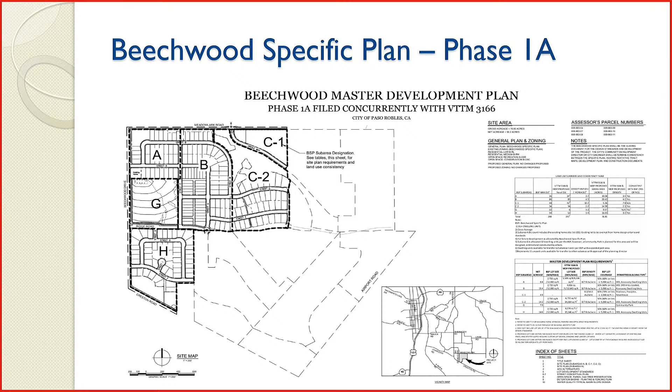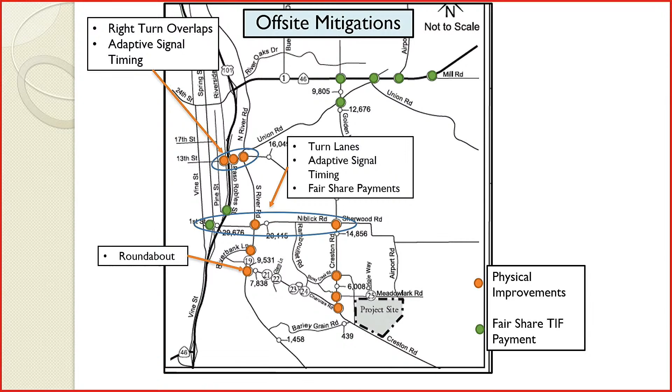And I would support Commissioner Jorgensen's comment that there's enough there that we can have this project move forward without really even addressing or trying to come up with some sort of tentative approval of architectural styles, and still allow the gentleman to move forward with the project, which I think we need to do. Thank you. Any other discussion points by the commission prior to my request for a motion?

I will ask if anybody would be brave enough to offer a motion. I will, Commissioner Neal.

Diving in with both feet - I'd like to move to approve draft resolution A, approving vesting tentative map, tract map 3166, along with list of new street names, and approve draft resolution B, planned development 21-11, subject to site-specific conditions of approval, not including architectural styles. I would like to also propose a change to conditions of approval 4.A, to bring specific home styles back to the full Planning Commission for approval.

I'll second the motion. We have a motion, Commissioner Neal, seconded by Commissioner Gibson. Is there any further discussion?

Mr. Chairman, I think we'd also want to eliminate the exhibits that show the specific architectural styles. So we'll change item number 4, and we'll remove sheet numbers - sheet 15 of 16 and 16 of 16 of the master development plan, which are the two sheets that show the architectural styles.

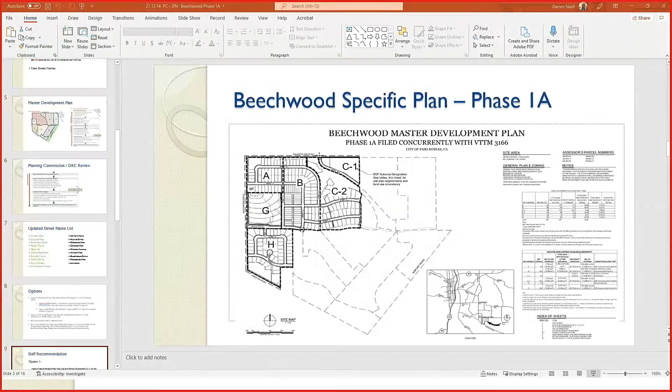Somebody wants to address that? Yes, Mr. Chairman, we have a couple items to discuss for the commission: one being the Planning Commissioner Reorganization Dinner, as well as the Planning Commissioner Academy schedule. Those kind of go hand in hand. Looking at February 27th, 2022 for the date for the reorganization dinner. We'll be getting more specific information as we move into the first of the year.

Darren, I will not be able to attend on that day. Okay, we'll make note of that. Jessica and Marcy have been working to get those details squared away, so that's being continued to work on. We'll keep you informed with that.

And then also the Planning Commissioner Academy is March 16th through 18th in San Ramon, California. They haven't provided a whole lot of information on what the criteria is or any of the specifics on that, but just kind of reaching out to take a look at your calendars and see if you'd be wanting to join and go to that conference. So was there anything else I needed to check in with them about on either of those?